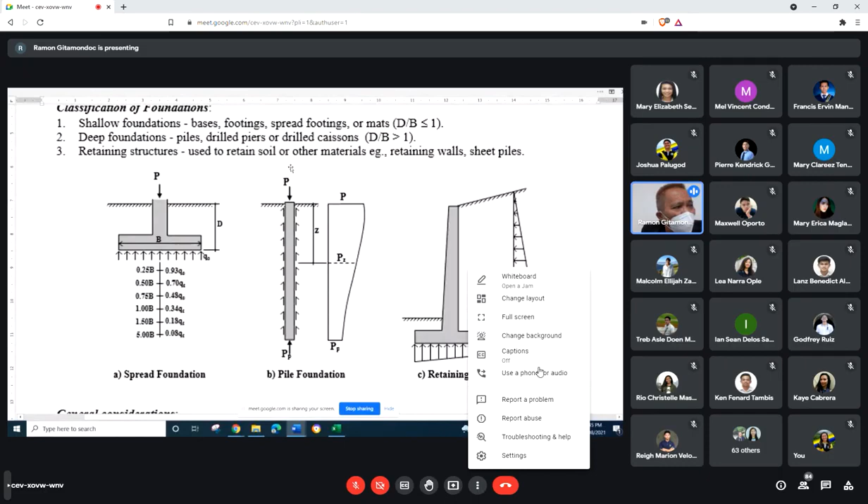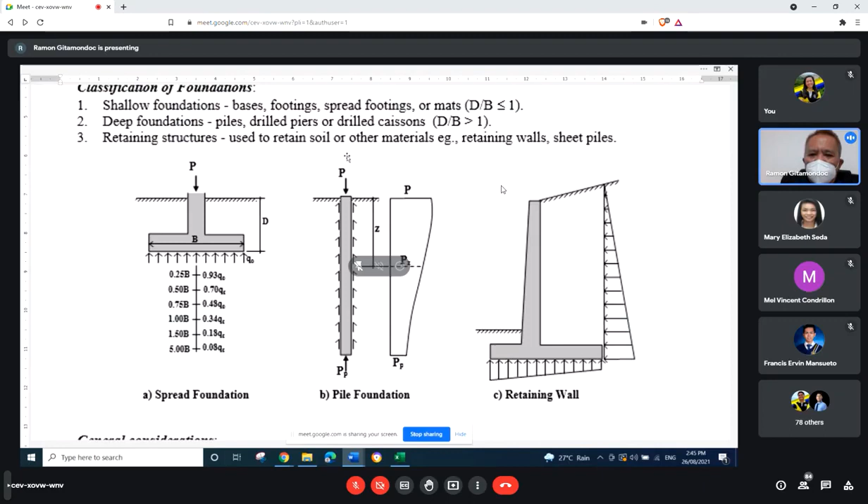We're going to discuss shallow foundation and retaining structures. But even for retaining structures, we'll be discussing only the more common ones: retaining walls. I'm not sure if we can still discuss counterfort walls, but evidently we'll not be discussing sheet piles, because sheet pile analysis is more complicated.

Okay, we still have 15 minutes, so let's continue.

Now, we have the following general considerations in the design of foundations. Number one, we have to determine the building purpose, the soil profile, the construction methods, and the cost. For building purpose, of course, some buildings are more important than others, and the factor of safety that we are going to introduce into the design depends on the importance of the building. For example, a residential building is not as important as a hospital, or a foundation supporting a communications tower, which is necessary in times of calamities.

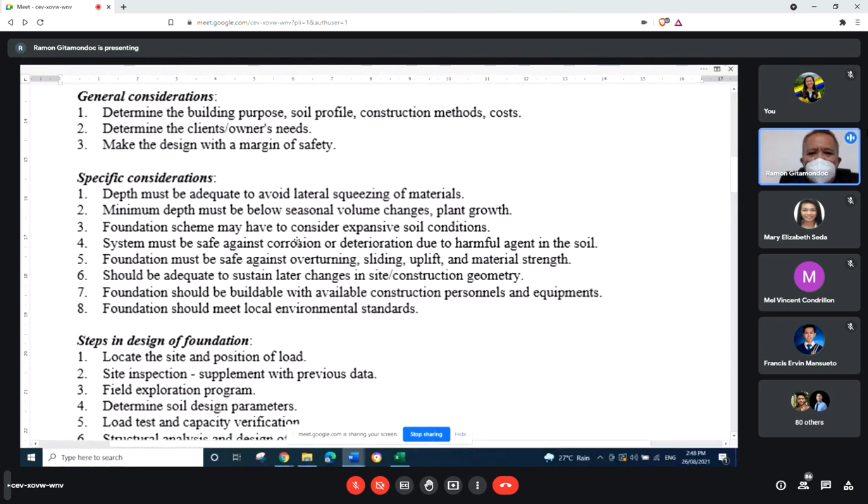And of course we have to consider the cost. All things equal, shallow foundations are less expensive compared to deep foundations. So we design pile foundations only as a last resort, because pile foundations are by far the most expensive. For pile foundations, there are generally two types: precast piles, or driven piles, and cast-in-place piles, or bored piles. Bored piles are usually more expensive compared to driven piles.

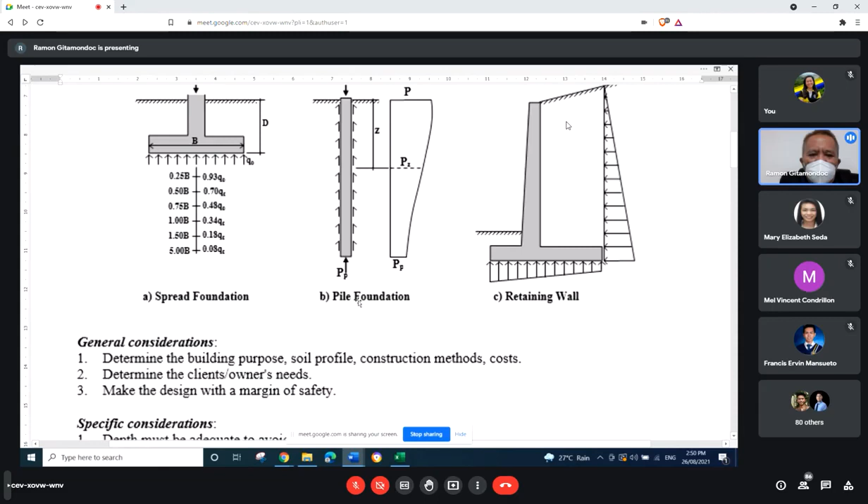But in some cases where the load requirement is very high, we cannot use driven piles, as there is a limit to the load that we can apply by driving the piles. It has a limitation on the availability of equipment that we can use to drive the piles. So if the loads are very large, then we can use bored piles. With bored piles, you can have very long and large diameter piles, whereas for driven piles, you cannot lift a very huge pile.

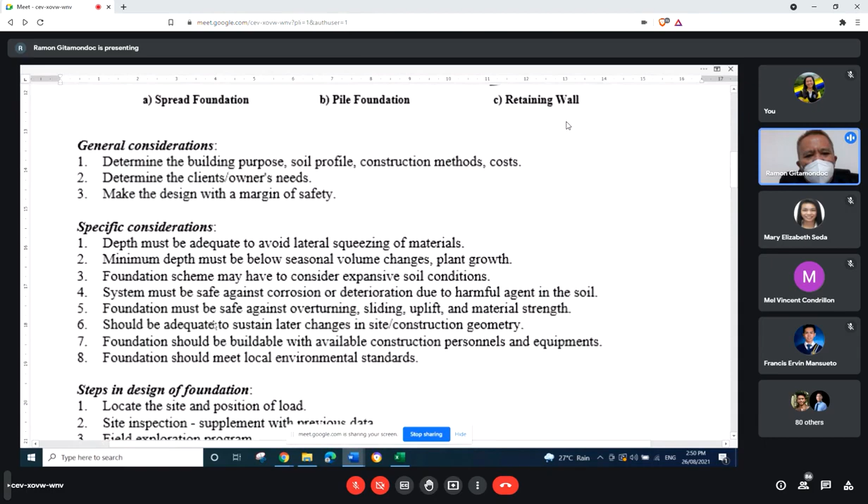So in the design of the foundation, we also have to determine the client or owner's needs. For example, you have to ask the client if he plans to construct a 20-story building, but for now, financially, he can only afford constructing 10 stories. Then you have to consider in the design of your foundation the 20-story future expansion. Otherwise, when you finish 10 floors, you cannot add any more because your foundation was not designed to carry additional floors.

So you have to interview and verify from the owner the purpose of the building or his plans for future expansion, if any. A possible change of loadings has to be anticipated. Those things have to be taken into account.

Then, of course, we make the design with a margin of safety. There should be an allowance for certain hypothetical overloads, and the structural code builds this margin of safety into the design calculation. The margin of safety will differ according to the use of the building. As I've already mentioned, in a hospital, you should introduce a larger margin of safety compared to a commercial or school building.

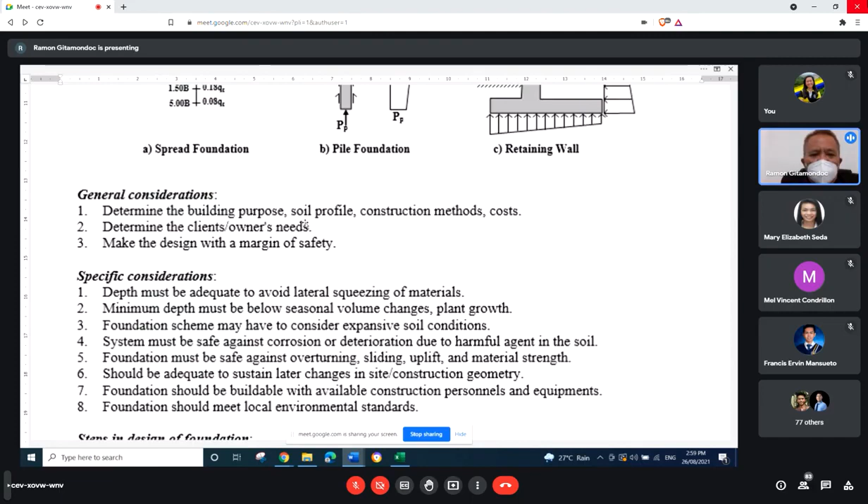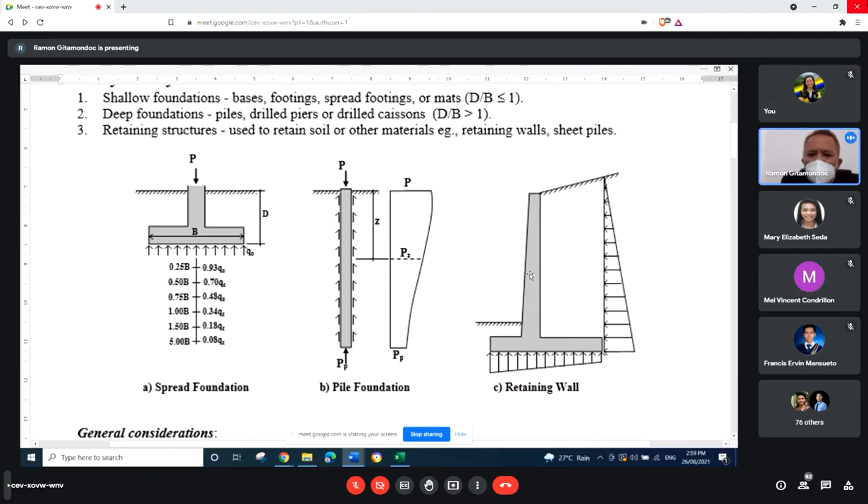For example, this retaining wall here. So we need to make sure it does not rotate forward. That is overturning. It does not necessarily mean that the retaining wall will topple forward. But what we want is to prevent excessive rotation or tilting of the retaining wall, because the retaining wall might still be standing, but if it has excessive tilt forward, then it might render it unusable, or it will appear to be seemingly dangerous.

Then sliding, so of course we will use our background here in mechanics on friction. So the frictional resistance is simply the normal force multiplied by the coefficient of friction, and in addition to that, some confining effect of the surrounding soil that will prevent sliding. Sometimes, if the flat concrete surface is not sufficient, we provide keys into the ground, like the heel of a shoe, to increase the sliding resistance.

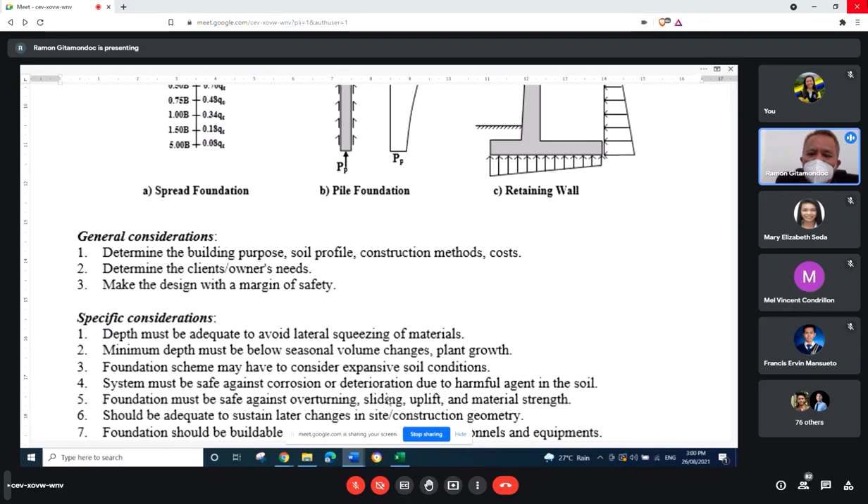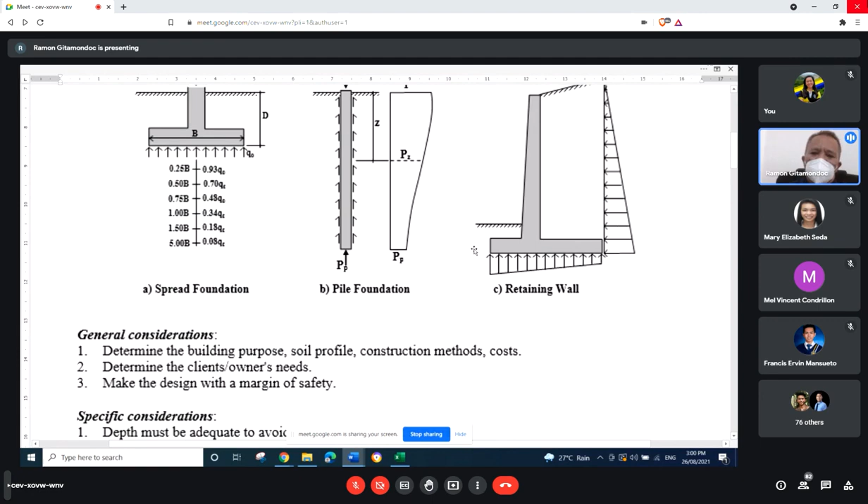Then uplift, so foundations have to counteract also hydrostatic uplift. So for example, in the retaining wall, there might be seepage of water under the foundation, and that will destabilize the wall. Because if there is uplift, then that will decrease the normal reaction, thereby decreasing the frictional resistance. With a decrease in frictional resistance, that will probably cause the wall to slide forward. So in the future, I'm going to show you some actual projects we had where we had to consider uplift forces.

Then also material strengths. So for our subject, we have only, I think, two materials that we have to consider. That is concrete and steel. So we have to know the properties of these two materials, concrete and steel. Then number 6, the foundation should be adequate to sustain later changes in site construction geometry. So we have to consider possible future expansion. That is why we have to really conduct an interview with the owner on his future plans for the usage of the building.

Then 7, foundation should be buildable with available construction personnel and equipment. So of course you have to consider the availability of the equipment, because if you do a precast design, you will require lifting equipment. If there is no lifting equipment, then don't do precast construction. So it needs to be buildable. Look first at whether the skills are available. For example, post-tensioning will require specialized skills. If that is not available in the locality, then don't use post-tension design. Use the conventional design.

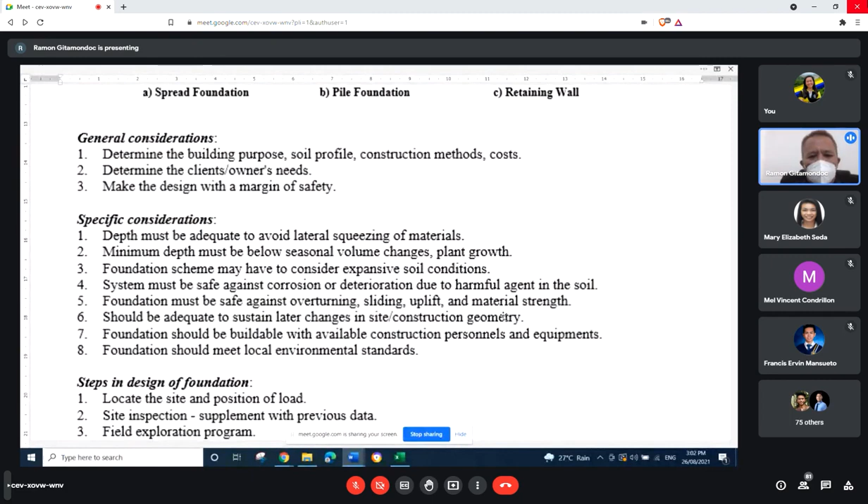Number 8, foundation should meet local environmental standards. So there are certain requirements; that is why in construction you need to ask a permit from the DENR, an environmental compliance certificate, so that you'll be able to satisfy the environmental standards. For example, when you excavate the foundation, you might contaminate the groundwater underneath. If the community relies on groundwater supply, then that's a problem. So you have to specify your construction methodology, interventions you can put in place to protect from contaminating the water or spreading pollutants and construction waste into the environment.

Okay. So it's already 3 o'clock, past by 3 minutes. So I think I will end here. We'll continue next meeting, Tuesday next week. So what will we expect by next week? We will try to finish this introductory part, then maybe we can start on the design of the spread footing. But I'm not sure if it is possible in one meeting, because I also want to let you see the provisions of the National Structural Code of the Philippines as regards foundation design.